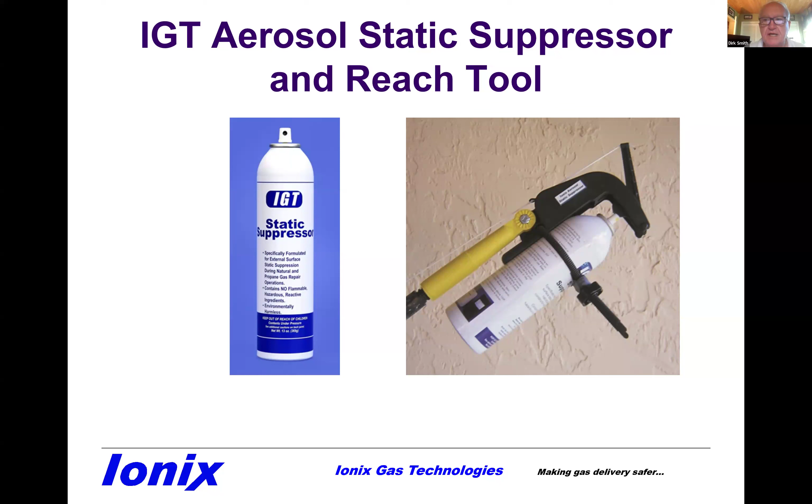This is excellent for any safety meetings. If you're already using the product, it will help you use it more effectively. If you're considering using this product, this will explain the benefits of using it, as well as an excellent educational opportunity for your field personnel to learn to deal with static ignitions.

So we're going to start with this video.

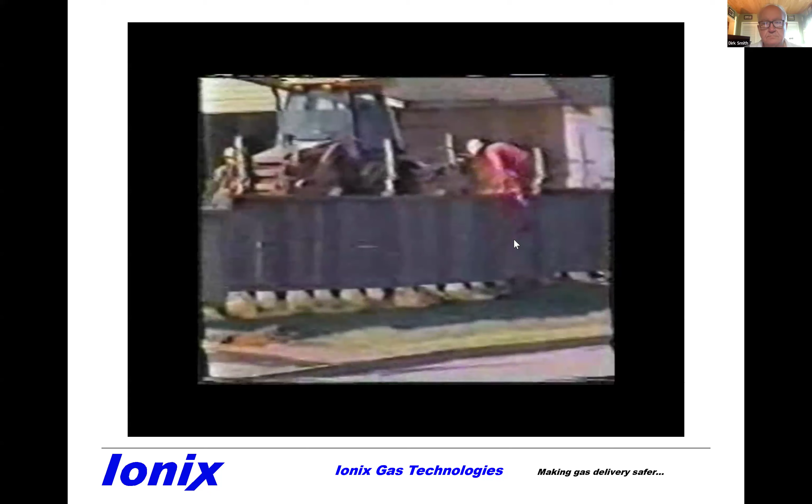A natural gas explosion rocked an Oklahoma City neighborhood just before noon today. Workers were trying to repair a ruptured line at Northwest 131st and MacArthur when the gas ignited. Newsline 9's Heidi Browning joins us live from that neighborhood. Heidi? Well, Kelly, there's a bit of a mess out here in the neighborhood. You can see behind me what's left of a fence, charred remnants of the posts, and quite a lot of digging that's been done to make repairs to those lines. But people coming home this evening will find a much calmer scene than what many people saw this morning. It started as a fairly routine repair job. ONG workers were trying to get the gas turned off after a 2-inch medium pressure line was accidentally cut. Suddenly, the gas exploded, sending huge flames into the air. 2 workers received minor burns. ONG officials say there's preliminary speculation that static electricity in the plastic pipe somehow caused the explosion. It took about 30 minutes to control the fire and get the gas turned off.

I apologize for the quality of that. That was done at a time prior to cable, and it was recorded off an over-the-air broadcast. But it's the only instance of an actual third-party damage igniting while workers are on site. And the purpose of this video is to prevent that from happening to your field personnel.

This chart was shared with me by Dave Zach at Aegis. He's a senior utility loss consultant for Aegis. Aegis insures virtually every gas utility in the United States. And the reason this is significant is everybody has their opinion of what causes losses or damages in the natural gas industry. This is what your insurance company actually pays out, and there's no better indication of the real problem than this.

If you look at this, over 80% of all the money paid out by your insurance company to local gas distributors is paid out as the result of an explosion or fire. That is more than all the other causes combined. This is telling you that your priority is to prevent an explosion or a fire. If you want to reduce your losses at your utility, this is how you're going to do it.

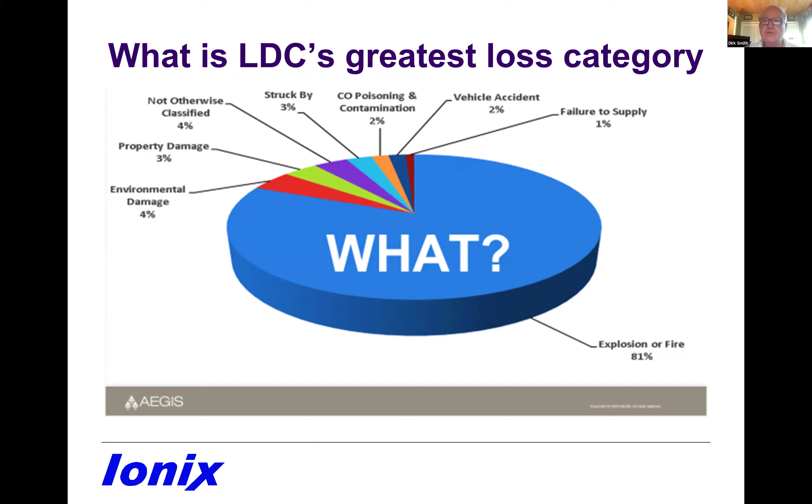And that's what we're going to be addressing today as we talk about static electricity and suppressing static electricity.

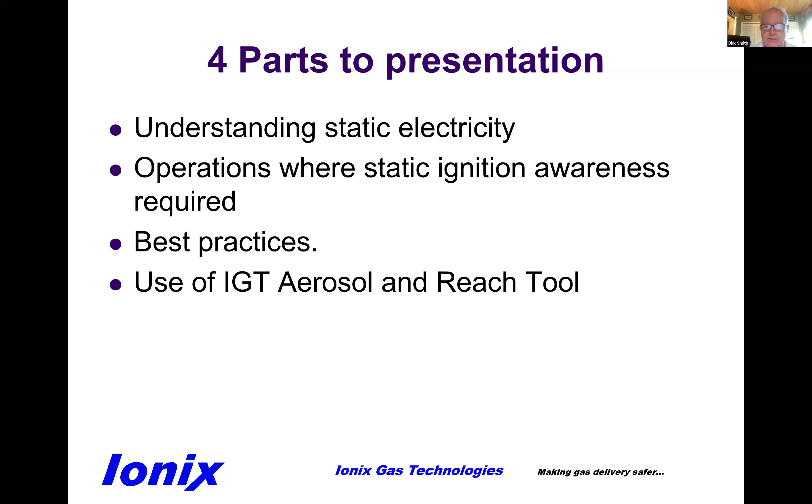Now, there are 4 parts to this presentation. I don't want to just give you a bunch of rules of what to do. I want you to have a little understanding of static electricity so you can recognize what it is. So we're going to talk about what static electricity is, the specific field operations where static ignition awareness is required, best practices, and then how our IGT Aerosol and Reach tool helps you achieve those best practices and reduce the possibility of a static ignition in your field operations.

So first things first, let's make sure we're all using the same terminology. When people say static electricity, for some reason they think it's some kind of inferior kind of electricity. I mean, there's real electricity that comes out of the outlet in your house that's powering my house, powering my PC and recording this video. But static electricity is kind of inferior, not as dangerous. Not so.

Electricity is electricity. The only reason it's called static electricity is because, unlike other forms of electricity, it's electricity that's sitting on a material that doesn't allow it to conduct. It's sitting on a material that's an electrical insulator, and therefore that electrical charge can't move. It's static.

For instance, I'm down in Boca Raton, Florida, and up in Juno Beach, Florida Power and Light has a generator. That electrical generator creates a whole pile of electrons, and it deposits those electrons on a piece of copper wire. Copper in and of itself inherently allows for the flow of electricity through it, and that's essentially how they pipe it, just like you pipe gas to a service. That's how they pipe electricity into our house - they put it on a copper wire and it flows along that wire into that outlet and powers this PC.

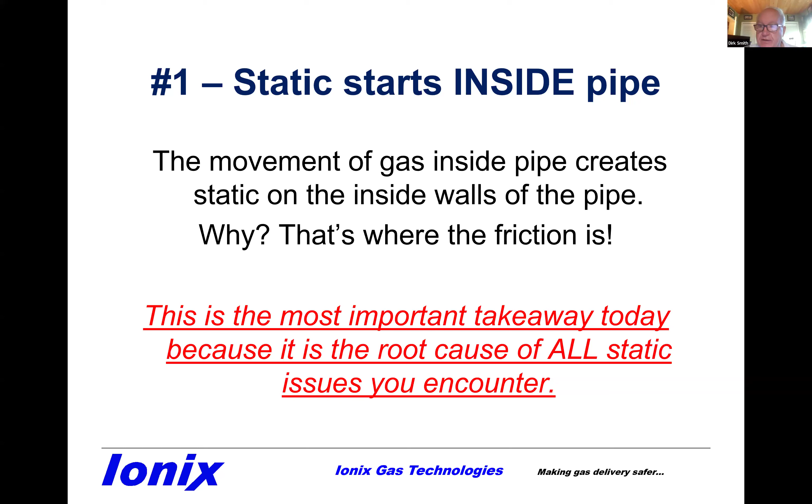Now, this is a little demonstration for our aerosol static suppressor that we recorded. The purpose of including it in this video is for this reason: static electricity, you cannot hear it, see it, smell it, taste it, or feel it. You do not have the sensory capacity to determine its presence.

This is an electrostatic voltmeter, mounted on a board. On the bottom of that meter, you can't see it, but there's a metal plate. What happens is this: when electrons start to accumulate, they start to throw off an electrostatic field. That field is detected by the metal plate, and the needle will deflect, indicating the presence of an electrostatic field.

So the purpose of this video is to show how easy it is to develop a static charge in a piece of poly pipe. This 60-second video will demonstrate the effectiveness of our aerosol static suppressor in eliminating static on the exterior of polyethylene pipe. We've mounted an electrostatic voltmeter above a section of pipe, and now as we reach over and rub the surface with some nylon cloth and move it, you'll notice the meter is indicating the presence of static.

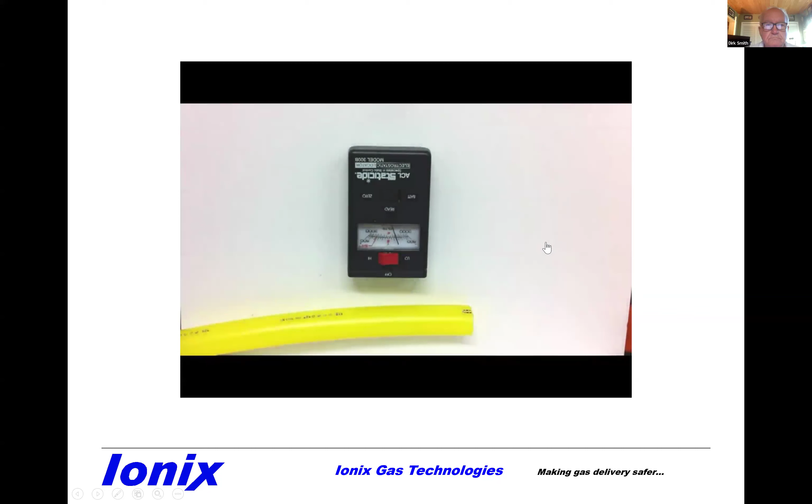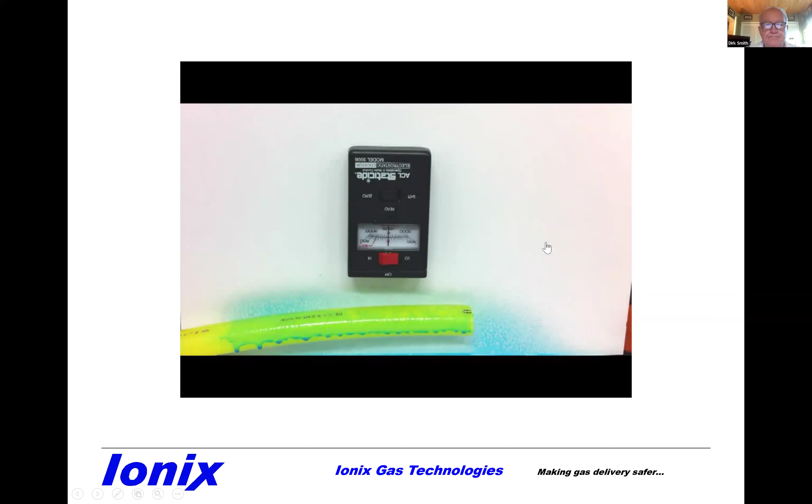We then take our aerosol, spray the surface, and you see that the surface static has been diminished immediately, indicating no static is present. If it's blue, there's no static. Now, the reason this is significant is because what we did on the outside of that pipe for 10 seconds is what's going on the inside of your pipe 24 hours a day.

Number two of the basics of static and poly pipe: once that charge is created and generated, it just won't go away. Remember, it's called static electricity because it's electricity that can't move. It's generated on a surface somewhere, and that charge just sits there. It can't conduct away. You can't ground the end of that poly pipe and expect that charge to conduct and move across the surface to that grounding strap because the material won't allow it to do that. That's why we call it static electricity.

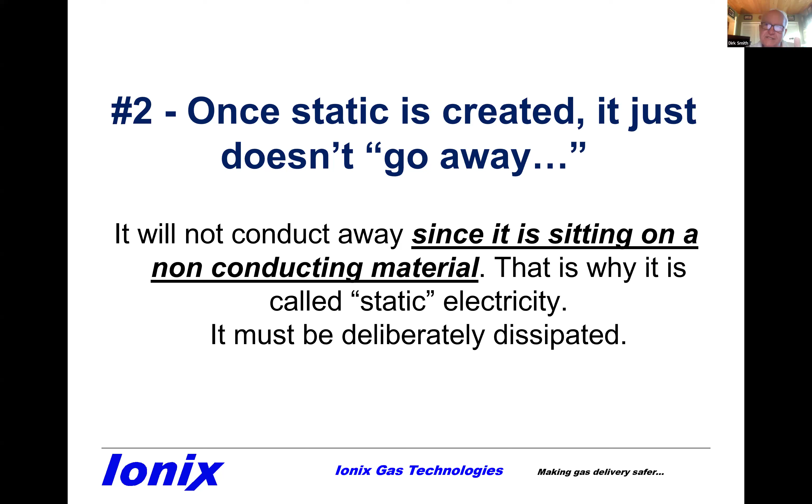So you have to deliberately go and dissipate the static where it is. The third thing, and this is not intuitively obvious, I could explain the physics to it.

The research has proved it to be true, but just take my word for it because it's too complicated and not necessary to understand the physics of it. When static charge is created on the inside of the pipe, it induces a charge on the outside of the pipe. So basically, when static is generated in a poly pipe, it's generated on two surfaces.

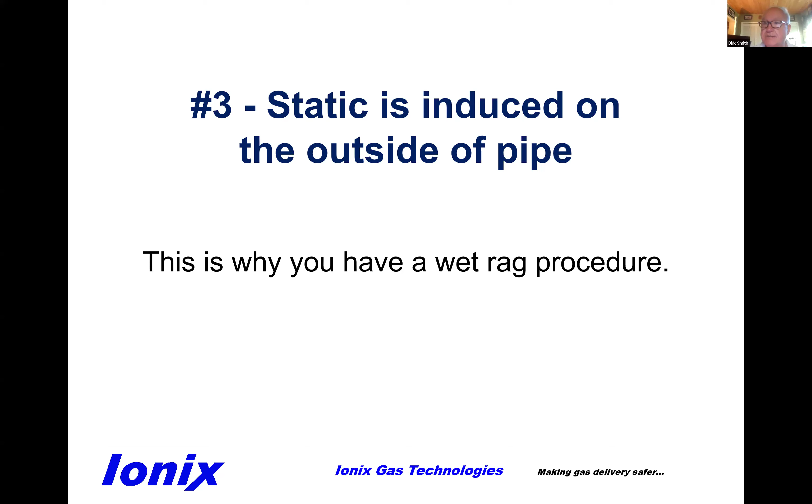It's generated initially in the interior, but it creates a charge on the outside surface of the pipe. That's the reason why in the past you've done static dissipation with wet rag procedures on the outside of the pipe. All static charges will arc - electrical static charges want to go to electrical neutrality. If you give them the opportunity, if you expose that charge in a gaseous mixture with exposure to ground, it's going to arc to neutralize itself. When that arc reaches 3,000 volts, it generates 1,100 degrees of heat, which ignites a gaseous mixture.

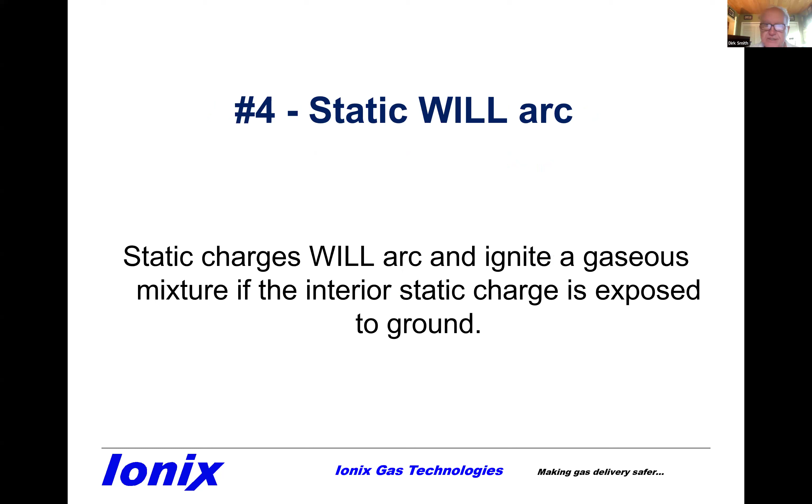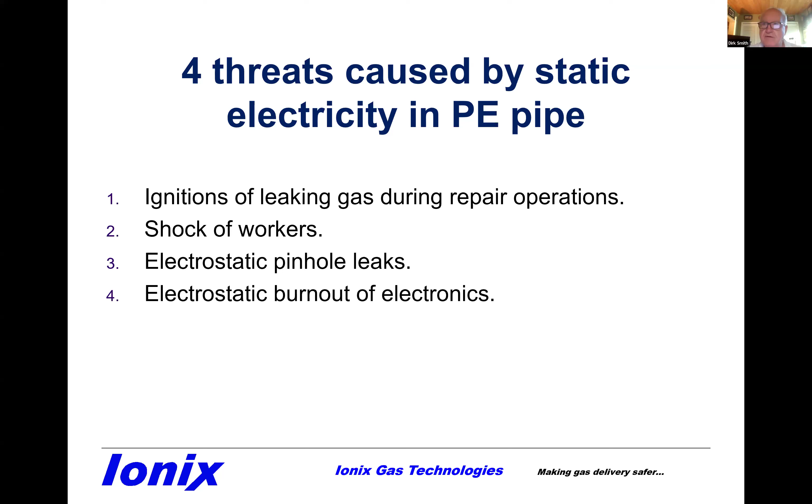So the static that's generated inside your pipe really creates four problems. We're basically only going to talk about the first one, very quickly about the second, and just gloss over electrostatic pinhole leaks and electrostatic burnout. But static in poly pipe causes these four things, and the root cause of all of them - electrostatic burnout, pinhole leaks, shock to workers, and ignition - goes back to that most important takeaway: all static is generated on the inside of the pipe by the passage of gas. That's the root cause of all four problems.

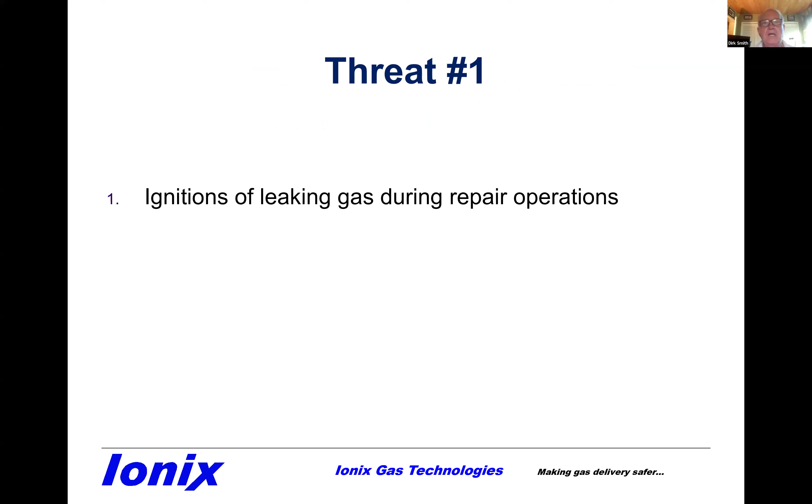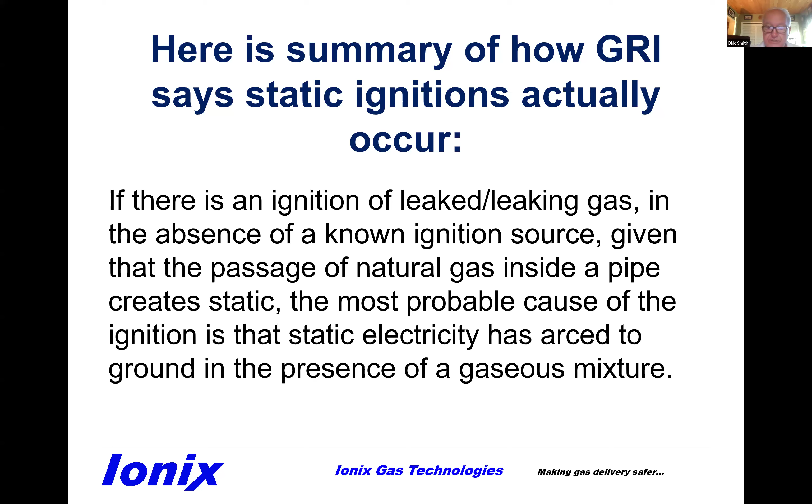So we'll talk primarily today about the problem of ignitions and leaking gas during repair operations. GRI says every ignition has to have an ignition source - every one, you can't have an ignition without one. Given what they determined about static electricity being generated by the passage of gas inside a pipe, if you've got an ignition of leaking gas with no obvious ignition source, by default the probable cause is static inside that pipe. So you have a very unique problem distributing gas in polyethylene pipe - in the delivery of your gas, you're creating its own ignition source inside that pipe.

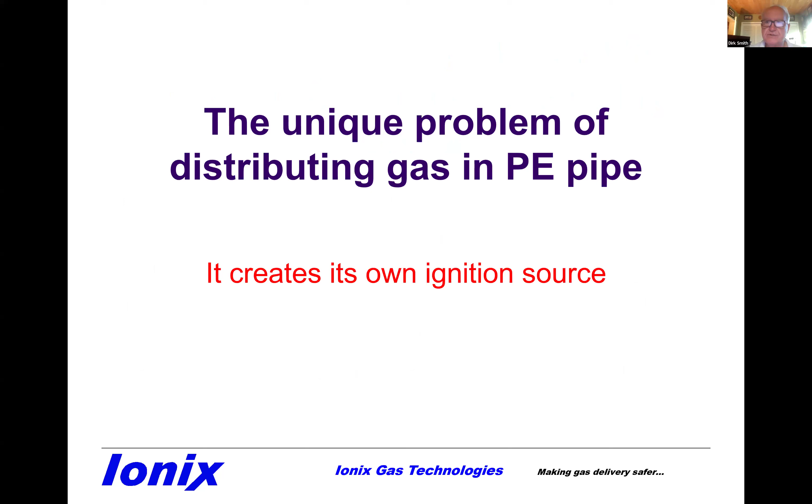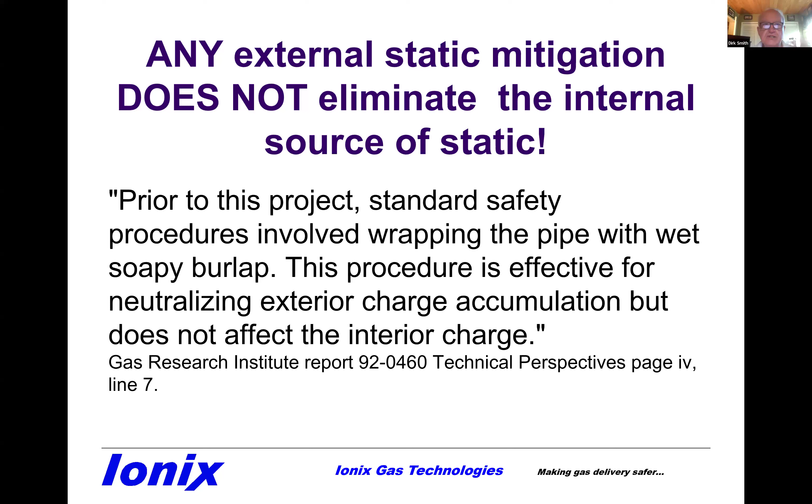That's what's happening. Now it's important to understand - remember, static electricity is generated on the inside of the pipe, and it creates a charge on the outside of the pipe. Whenever we talk about external static dissipation, GRI emphasizes this, and that's why I include it here: dissipating the charge on the outside of the pipe does nothing to get rid of the charge on the inside. So if you cut into the inside of that pipe and there's static there, you could still have an ignition, even though you've dissipated the static on the outside.

Now we're going to talk about the four most dangerous static ignition operations and how to use our aerosol to mitigate the risk of an ignition. These won't be any kind of deja vu experience for you - you'll be aware of all these. That's not the point. I want you to understand where the problem is in each of these operations so that if you're using our anti-stat, you're addressing where the static is in that operation to minimize the risk of an ignition and somebody getting hurt.

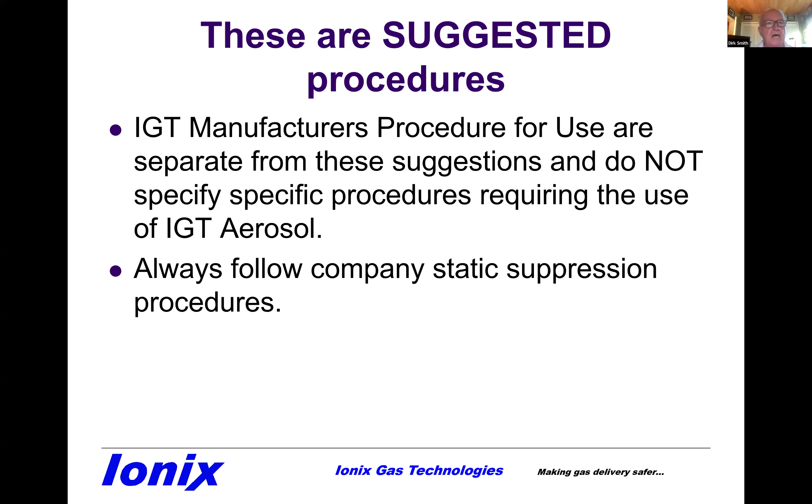I don't have time, but I can tell you horror stories about guys who didn't do that.

We're going to talk about the first thing. The most common and most major situation is when you have third-party damage repairs or O&M operations.

You have to understand that you need to get rid of the static on the outside, but you also want to be sure to get as much anti-stat as possible inside the cut or tear, the damage in the pipe, to reach those areas where static is being generated.

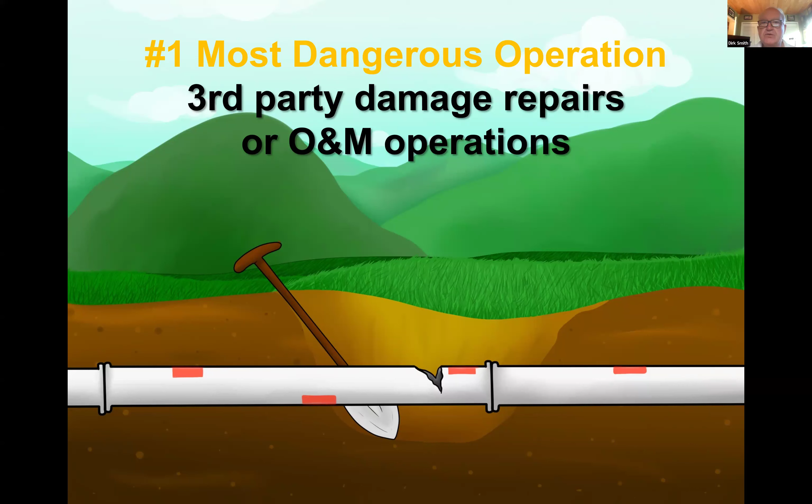So when you have a third-party damage pipe or an O&M like this, you want to spray the outside of the pipe from a safe distance of at least 6 inches.

We have a reach tool, and I'll show you what that's like. Essentially, it's like an extension pole that holds our aerosol and allows you to stand at a safe distance and spray. So when you have a damaged pipe like that, you want to stand outside, spray it from a safe distance, and make sure everything's blue.

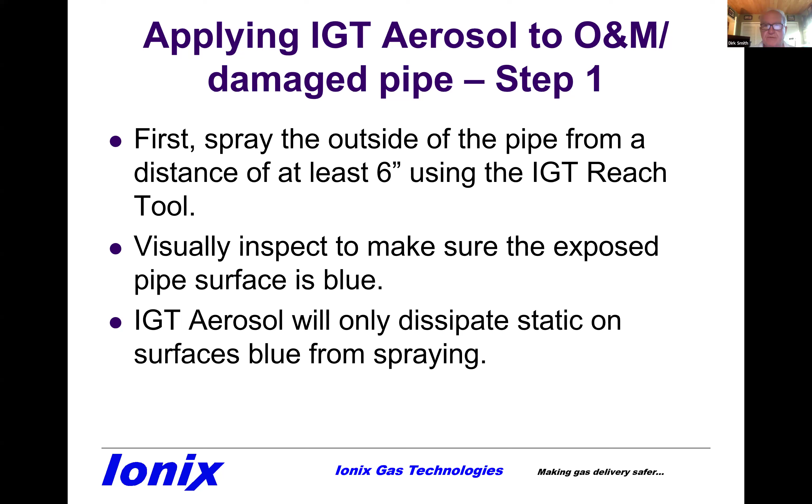Remember, our aerosol will only dissipate the static charges when the surface is blue, meaning it's wet from our spray. If it doesn't get sprayed, there's still a static charge present.

Once you've stopped the flow, you can carefully spray into the cut or the damaged area to try to get the aerosol to touch any static that's inside the pipe. If the pipe is blowing, you obviously won't be able to get the spray into where it's blowing, so get it as close as you can.

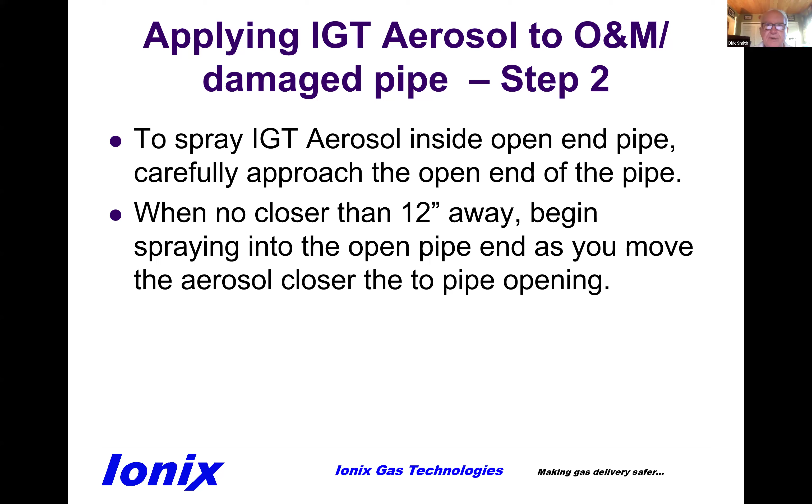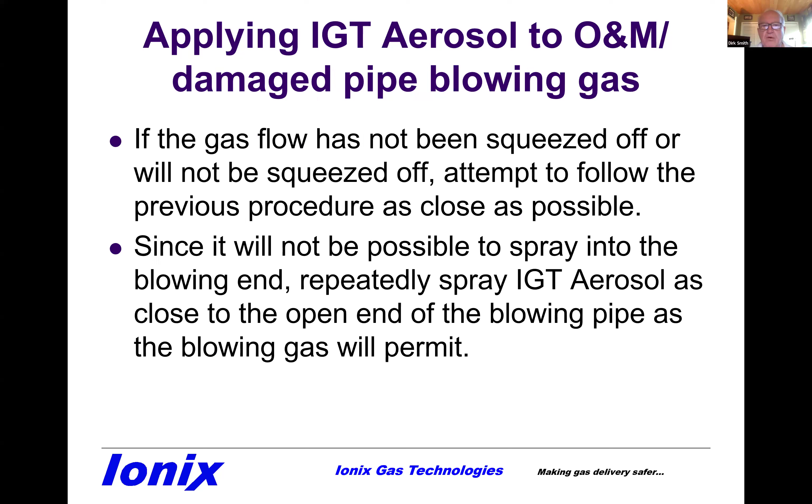As soon as the flow is stopped, spray on that spot. If you've squeezed off the pipe and you're going to cut into it, spray the tool and spray on that area so our aerosol is carried in with the tool and can dissipate any static inside the pipe. If the pipe hasn't been squeezed off, spray as close as you can to the blowing hole to get as much anti-stat near that surface as possible.

Now, the second dangerous operation is purging gas. This is kind of like third-party damage, except it's controlled by you.

What happens in metal pipe is if there's dirt, grease, corrosion, or coatings, all of them act as electrical insulators, and static charges can accumulate on those surfaces. So always presume static is present, even though you've grounded it.

Just like that damaged pipe with third-party damage, where gas is escaping and static buildup is in the turbulence of the cut, it's the same way at the edges of the opening of that purge pipe. Static is going to build up on those inside edges.

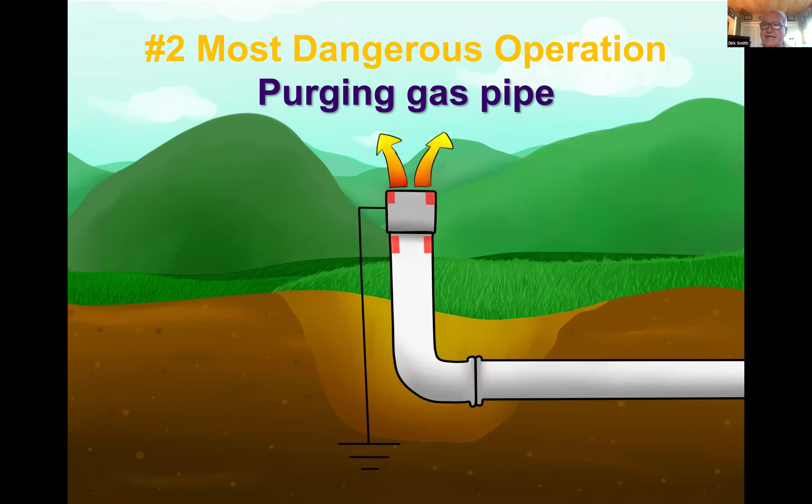And if you've got a joint with a coupling connecting metal pipe with plastic pipe, because the joint won't be perfectly smooth, you'll have turbulence between the metal pipe and the plastic pipe joint, and static can build up there. So be aware there's going to be static inside that connection, inside that pipe.

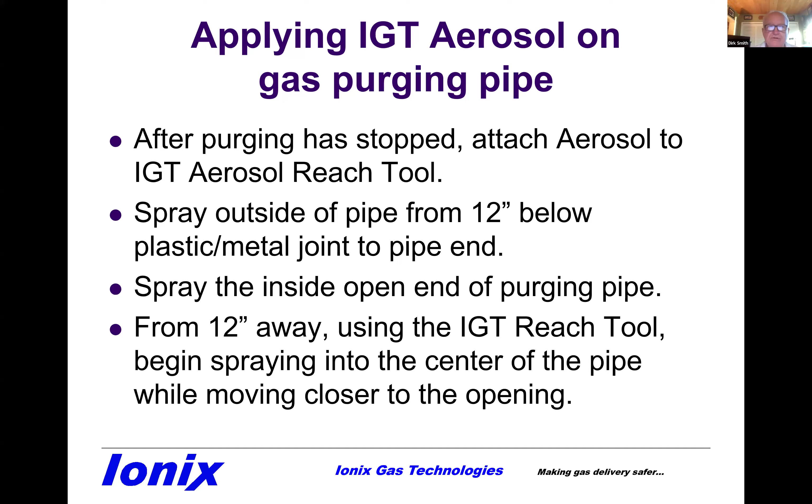So after your purging is done, use our reach tool and spray outside the pipe from about 12 inches below where the metal pipe and joint is. Spray the inside edge of it, and begin spraying as you get closer to it. Then also, when you take it off, spray inside it too.

Now the third major operation is when you're doing repair operations downstream of a squeeze off.

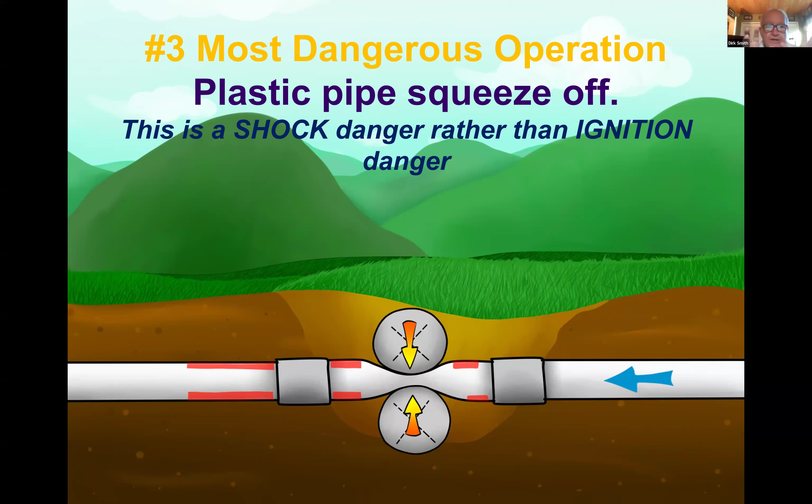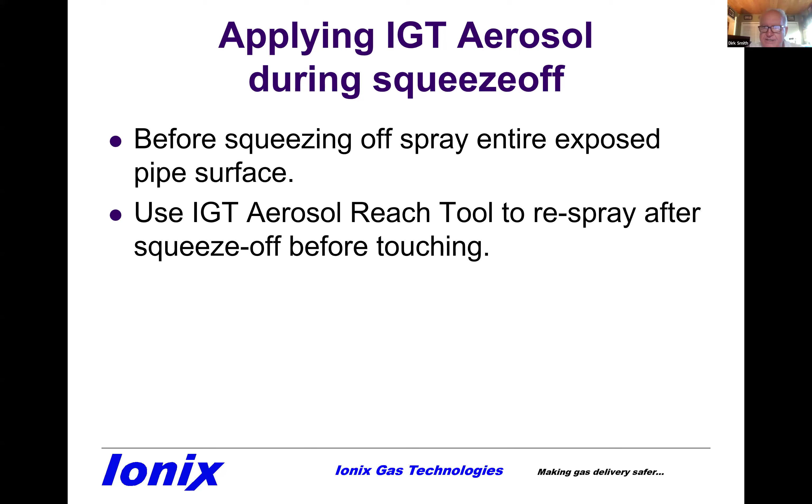It will also develop upstream, not as far, but it will develop upstream from your squeeze-off. So when you're getting ready to cut into that pipe, spray the outside of the pipe before squeezing it off, then respray it after your squeeze off before touching it, because it has such a high voltage being generated. When you're cutting into that downstream section, spray onto the tool and spray into the cut to carry our anti-stat inside where that static is going to be generated.

And if it comes in contact with any static, it'll dissipate the charge. Don't worry about the IGT aerosol getting in the gas stream. It won't bother it, and you won't get enough in there to make any difference. Just be sure to wipe the tool off of the IGT aerosol when you're done.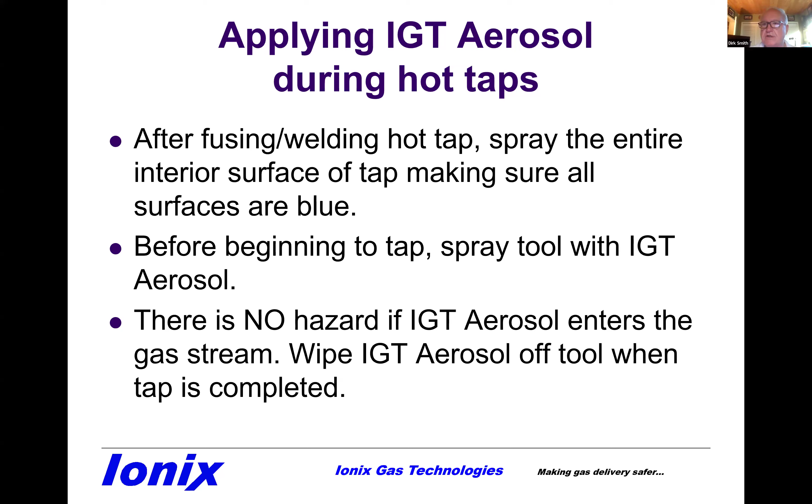Finally, when you're cutting into a piece of pipe that's previously been under pressure, removed from service, or cut into or reached into, always spray the outside of the pipe and the tool with aerosol. I had an instance where a couple of guys out in the western United States had a stubbed line, about a 6-inch stub line. What had happened is they were going to extend the service on the stub line.

So they shut the line down, took it off pressure, and these guys went with a tool to cut through the pipe. As soon as it broke through on the inside of the pipe, there was a boom, and the two guys went to the emergency room. No fire, electrical shock. The gas utility was embarrassed because they hadn't called for a locate. They called the local electric company and said, hey, sorry, we cut into some of your electric lines out here. The electric company said, we don't have any lines out there. It was static electricity in that stubbed line.

I also had an instance where a polypipe was cut and removed from service for some reason. A guy reached inside it. There was still enough residual static and methane in there, and it flashed and burned hairs on his arm.

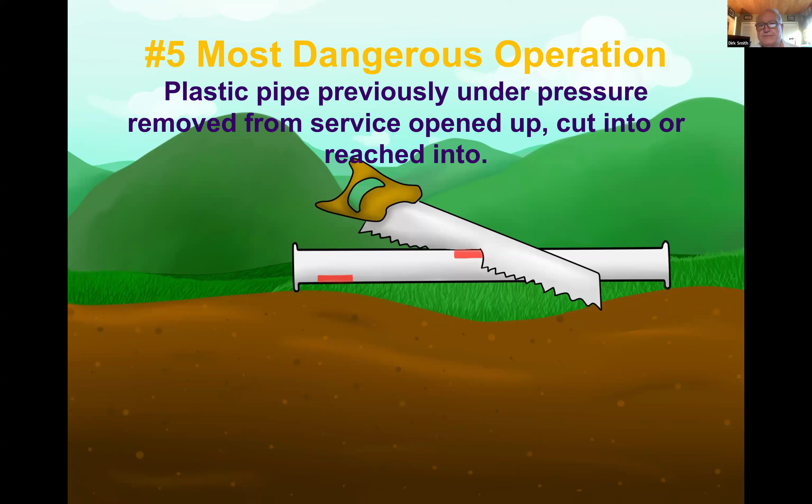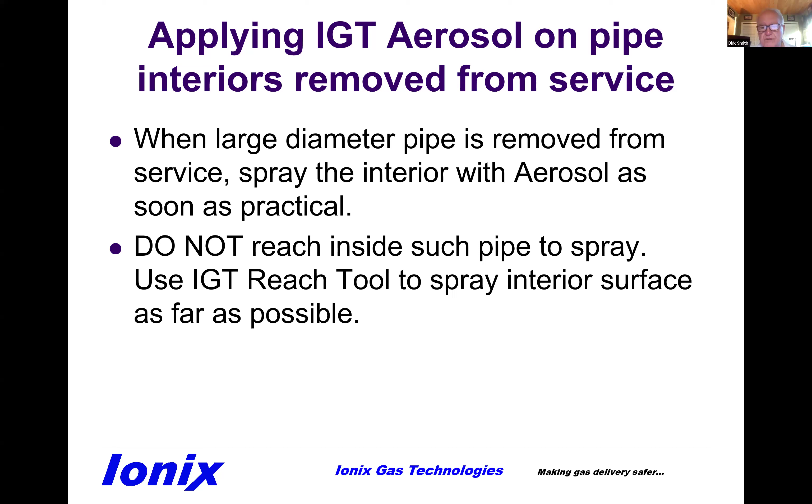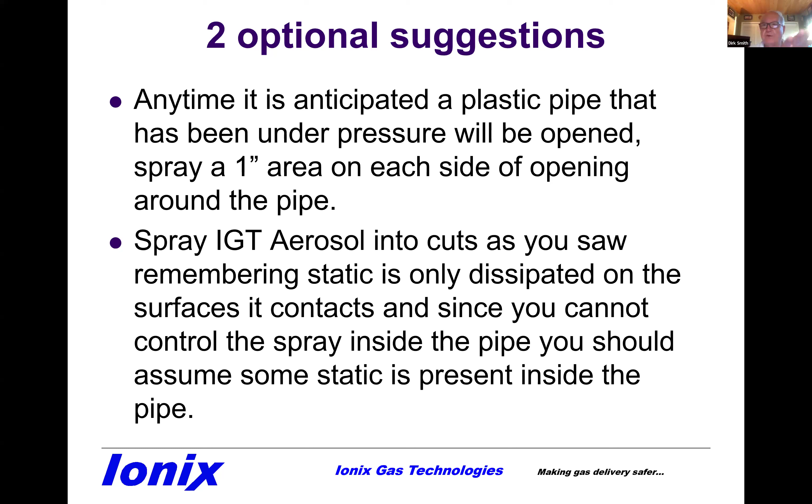So always spray the surface you're cutting into. Never reach into a piece of polypipe without spraying and dissipating the static charge in there. If you have to reach inside it, use a tool or a reach tool to get inside there to spray inside that pipe. If the pipe has been under pressure and you're going to open it up, spray a 1-inch band around it before cutting into it. And always, whenever you're cutting a piece of pipe, spray into the cuts as you're doing it, so our aerosol is carried into the cut when you're sawing it. That'll help dissipate any charges it encounters.

Now I want to talk about shock to workers. We're going to go back to squeeze off because this is the primary area where this is the case. Again, the static charge in there is so high. I had a report that there have been burn fatalities in the gas industry and O&M operations. That's no surprise. I hadn't heard of a serious shock incident until about 5 years ago when I was teaching the static class at the Northeast Gas Association Gas Operations School.

I was told of an incident that occurred up there where some guy was working and the static electricity from the pipe arced through him and went through him and out his big toe. It's all the static being generated inside that pipe. It could be during normal operations, but especially at squeeze off, you have to be extremely careful.

It was so bad it stopped his heart. So they had to give him the heart paddles and then defibrillators. And then he had his big toe amputated because it burned his big toe where the charge went out.

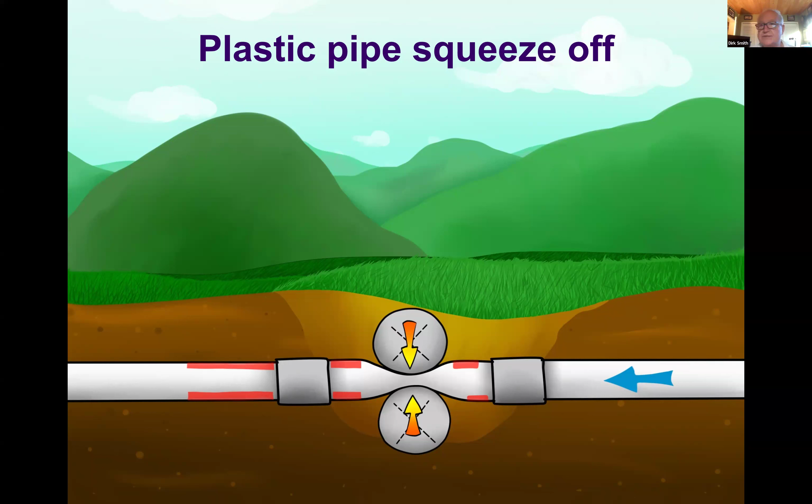So it's absolutely imperative that you always ground your tools. The grounding of tools is not a static suppression procedure, it is a worker protection procedure. If you encounter a charge, the charge goes through the tool, through the grounding strap, and into the ground. If you disable your grounding straps or do not use them, that static charge will come through the tool to you and out the bottom of your feet or out your arm, and you do not want that.

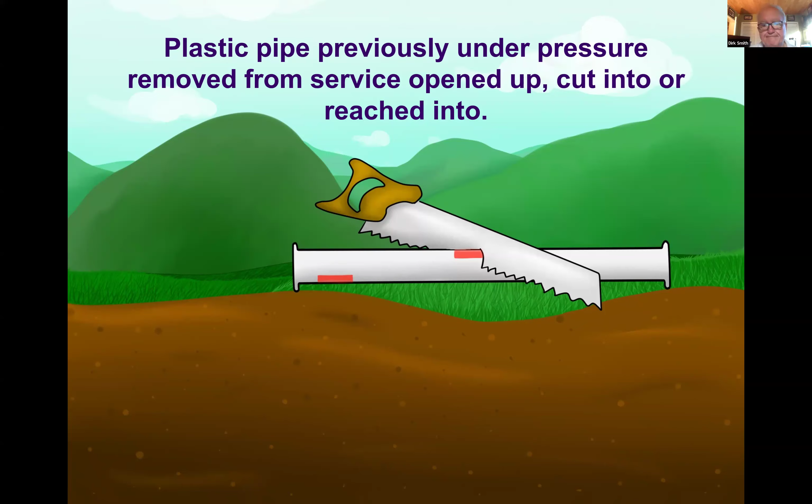Now I want to talk to you about the two last threats, which are electrostatic pinhole leaks and electrostatic burnout of electronics. Static electricity causes pinhole leaks in polypipe. In some systems, when we got rid of these pinhole leaks, there was an 80% reduction in leaks. There is probably a lot of leaks in your system which you just think are leaks, when in reality they're being created by static electricity.

That's not my point in talking to you about that. The reason you need to be aware of that is this: it is very common when you squeeze off pipe, the static charges are so high downstream that they put pinhole leaks in the pipe. So therefore, when you squeeze off, you should always soap leak test the pipe, all the exposed area, before you bury it again to make sure you don't have any electrostatic leaks.

If you find pinhole leaks in your system, it is not bad pipe. Every time pipe manufacturers have been accused of having defective pipe, forensic lab analysis 100% of the time has said it is static electricity. It is not defective pipe. If you have that problem, call us.

And finally, the other thing you're going to start to see more and more is electrostatic burnout of electronics. If you have solid state electronics, which is extremely sensitive to static electricity, and you have static in your system, that static can arc through a barrier, arc to the electronics and burn it out. I've had instances of locator transmitters being burned out when the static charge inside the pipe arced to the tracer wire and back to the transmitter and burned it up.

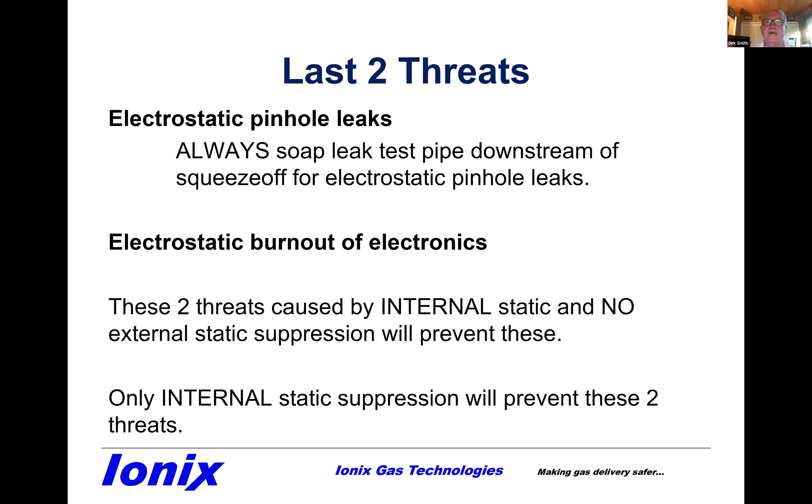So remember what I said before. There are 4 threats from static electricity: ignitions, shocks, pinhole leaks, and electrostatic burnout. And the root cause is cause number 1 from the slide I told you, don't forget: all static is generated by the passage of gas inside the pipe. It starts internally, that's the root cause. It manifests itself in ignitions, in shocking workers, in creating pinhole leaks, and in burning out solid state electronics.

Now we can talk about our static suppressor. Our static suppressor is a state-of-the-art static suppressor. Back in the 80s, when polypipe started being used in the United States, this problem of static electricity became evident. The problem was there was no other solution.

AGA recommended wet rags. Essentially it is a grounding mechanism. You take those wet soapy rags, wrap it around completely on the surface, trail it to ground. You assume there's a connection, you don't know. You assume there's an electrical circuit, that the water and the soapy water has completely covered the pipe, and any static charge is transmitted by the water, conducts through the water down to the ground. It is very clumsy, it's very awkward, it's dirty, it's slow, it's labor intensive, but that's all you had.

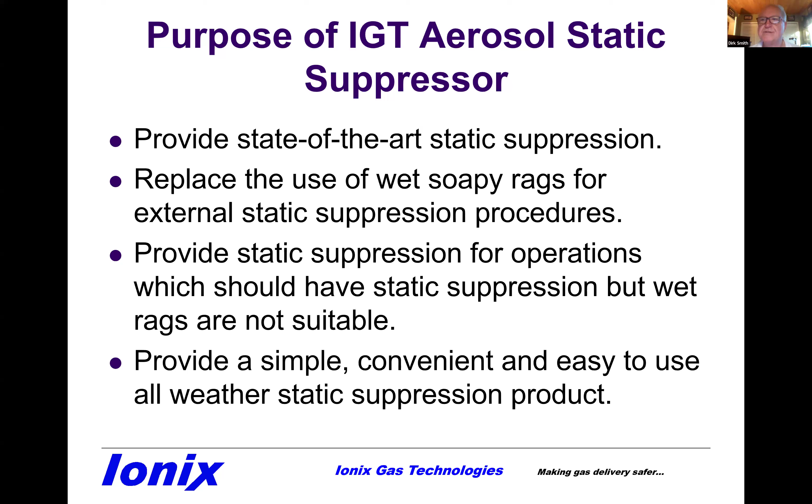Our aerosol static suppressor is designed to replace that. It's an all-weather static suppression product, very versatile. You can use it in a lot more operations than you could use wet rags. To make sure our product would not affect PE, would not affect your fusing operations, that it was not flammable, and that it was as effective as wet burlap in eliminating static, we went to the Gas Technology Institute's testing labs, and they evaluated our product and confirmed it doesn't affect the PE, doesn't affect fusing, it's non-flammable, and it's every bit as effective as wet burlap in eliminating static.

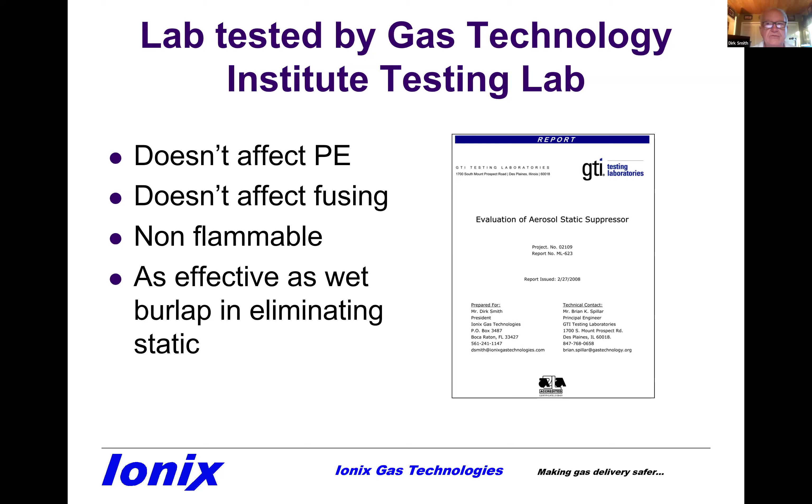And if you'd like the report, we can email it to you. Now, the nice thing about our aerosol is when you have soapy burlap, you have to keep that burlap wet, the pipe wet and everything. You don't have to do that with ours. When you spray the surface, that's it, you're done. And you don't have to ground it, you don't have to keep it wet.

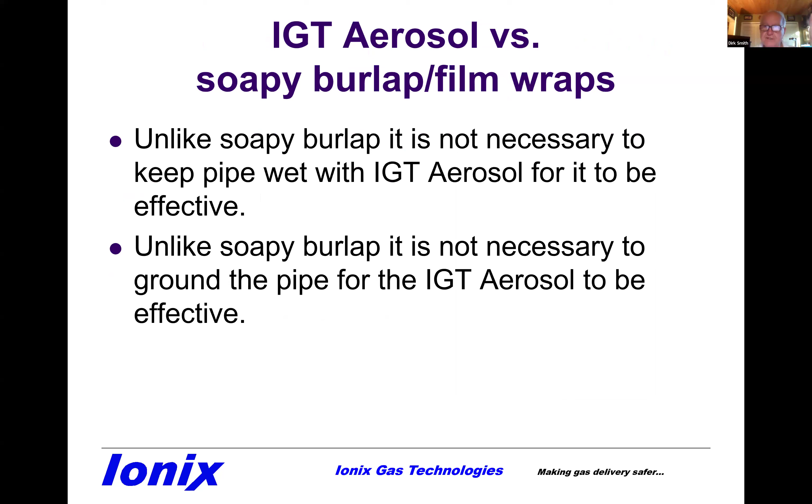When you spray a surface with our aerosol, it'll eventually dry down. It is still dissipating static even after it dries.

Our aerosol comes in two formulations. We have customers that are in very cold climates, so we have a regular formulation that sprays to freezing, maybe a little bit below freezing. And then we also have a formulation if you have to do repair work under 32 degrees, a low temperature formulation that sprays to -20. Both products work identically, except one has a lower freeze point.

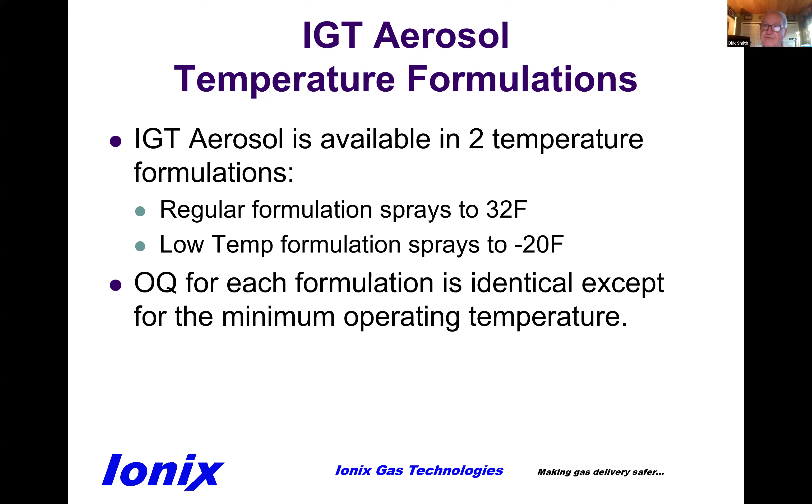If our aerosol happens to freeze on you, don't worry about it. Thaw it, shake it up, it's fine.

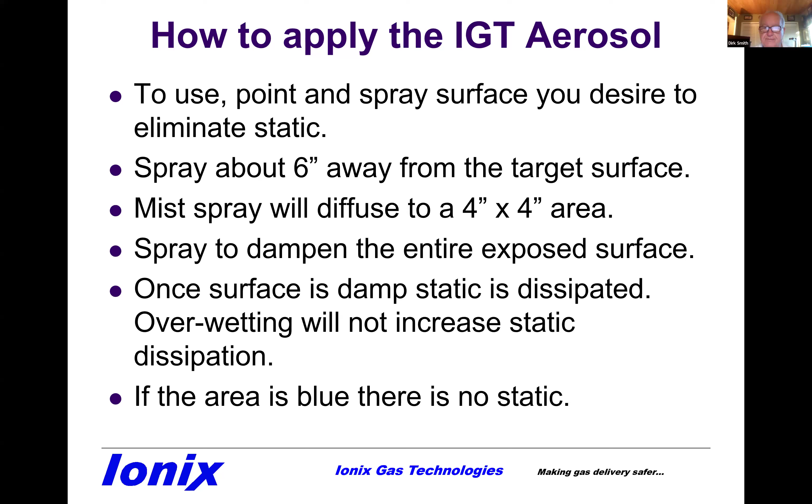It's very simple to use. You just point and spray, get about 6 inches away from your target surface. It's going to mist a 4x4 area and just dampen it. You don't have to get it wringing wet. Once it's damp, the static is dissipated, and overwetting will not increase any static dissipation. If the area is blue, you can see it's blue, there's no static.

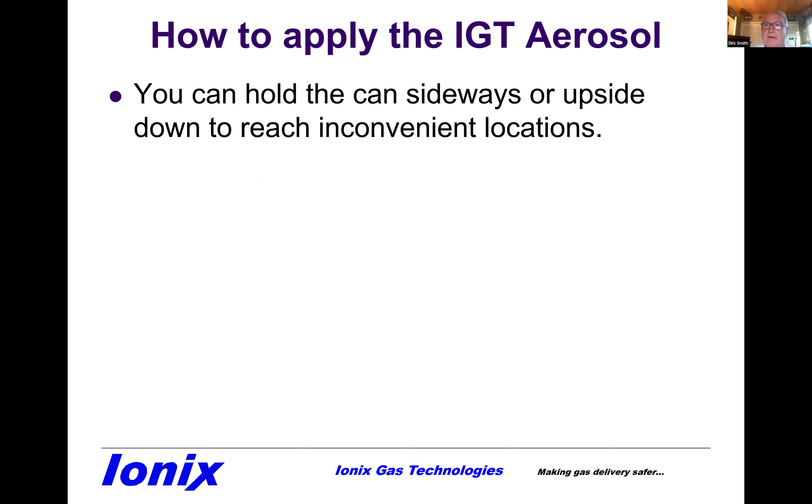Our can will spray upside down, right side up, or sideways. That's important when you have our reach tool. Let's say you've done a squeeze off on an excavation, and now you want to dissipate the static. On the reach tool holder, you can tilt the end and spray upside down if you need to. This is just a little demonstration of how to spray it. Whoa, that didn't work well. Here we go, let's try this again.

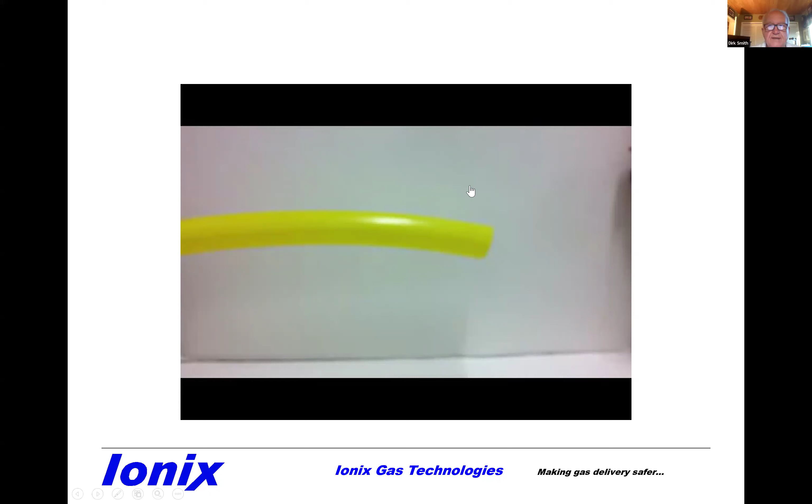Just a simple spray, doesn't have to get super wet. That's all you need to do.

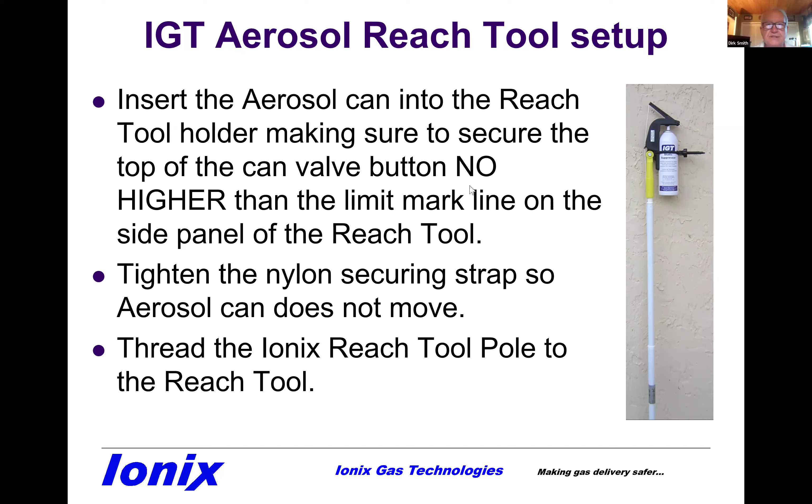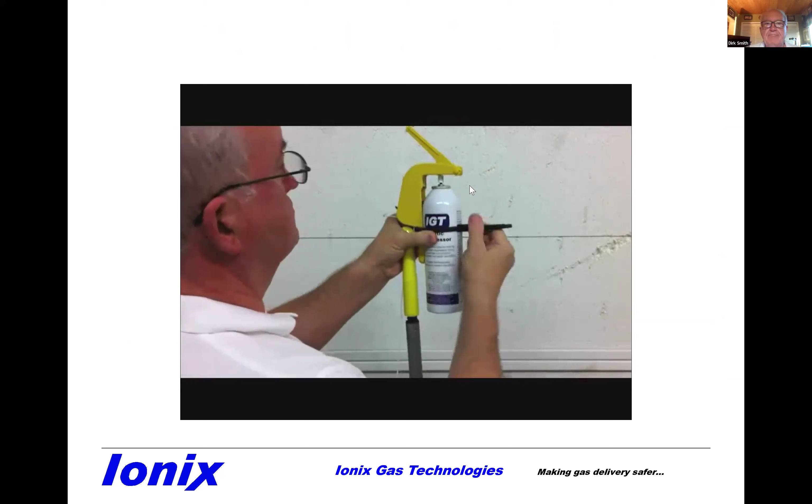All you do is insert our aerosol can in the holder and tighten it up. There's a limit marker there. You just tighten it up and then you're ready to go. It will sit there. This is just a little quick demo to show you how you put it in the can, tighten it up, and then it allows you to spray any kind of surface from a safe distance.

Again, if our aerosol freezes in the can, don't worry about it. Just thaw it out, it'll be fine. Shake it up. When you spray it on a surface and it freezes, don't worry. The liquid has water and a few other chemicals in there, but the anti-stat, when it's on the surface, even though it would freeze, it's still effective in dissipating the static. Reapplication is not necessary.

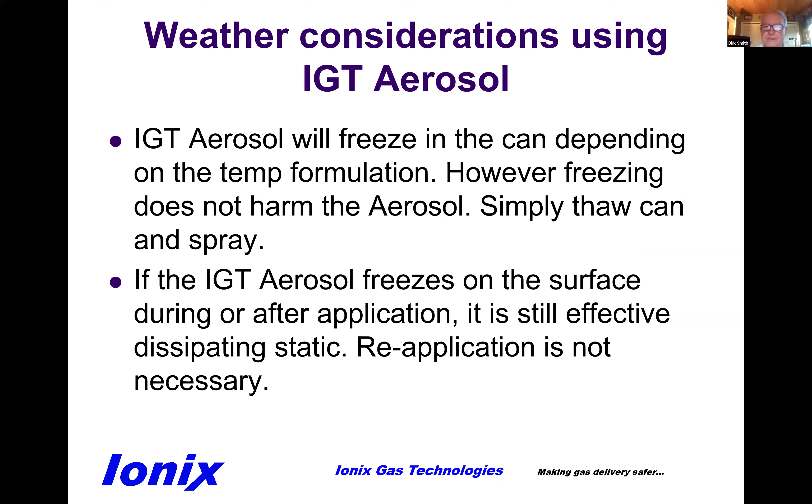While we have two different lower limits on the aerosol, there's no practical maximum temperature, because if it got high enough to make our unit ineffective, you're not working in that anyway. So you don't have to worry about that.

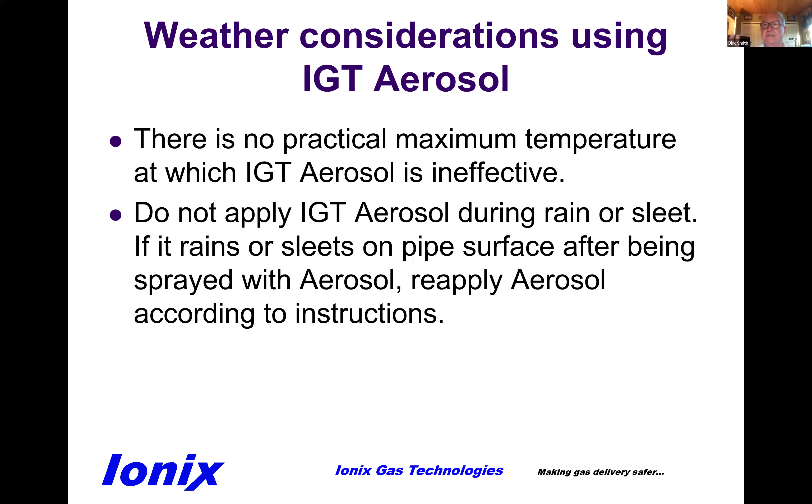Don't apply our IGT aerosol when it's raining or sleeting, because it's just going to get washed off. So wait till the rain or sleet stops, and then spray it on the surface.

Make sure you visually inspect it, make sure all the surfaces are blue from the static spray. Only surfaces that have been sprayed with our aerosol are going to have static dissipated, okay?

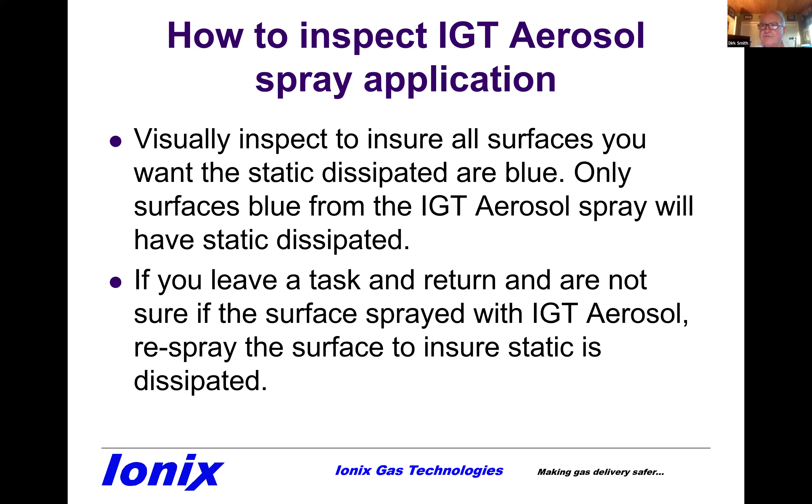Now let's say you spray a piece of pipe and for some reason you have to leave. You don't necessarily have to respray it when you get back to ensure the static is dissipated. If you're gone for a couple of weeks or it gets rained on, yes, you've got to respray it. But generally, if you leave it for a day or two, you shouldn't have any problem.

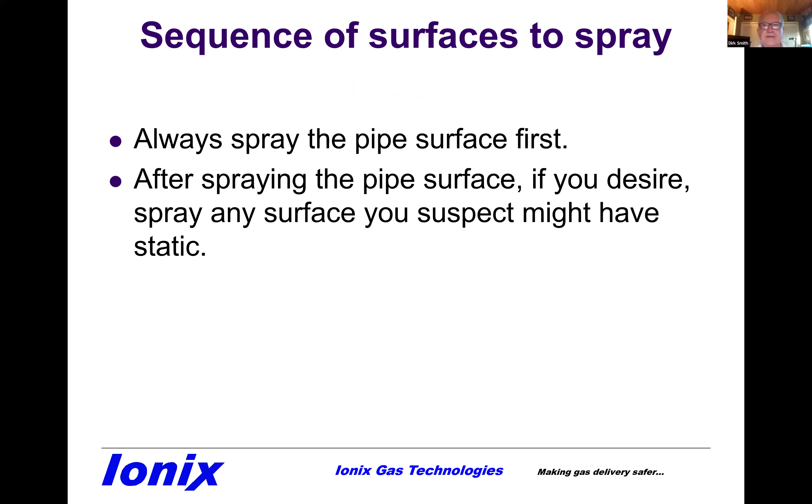Always spray the pipe surface first. Why? That's where the static originates, that's the root cause. After you do that, if you want to spray another surface, a tool, anything like that, go ahead, but always spray the pipe surface first.

Our aerosol will dissipate static immediately on contact when it dampens a surface, and that surface could be anything—plastic, metal pipe, a tool, clothing. We don't recommend it on clothing, but people think static electricity cannot build up on pipe. That is not true. Any kind of pipe that has a coating on it, or oil, grease, or dirt, those areas act as electrical insulators, and static charges can accumulate on those areas. So you can use our aerosol on those surfaces.

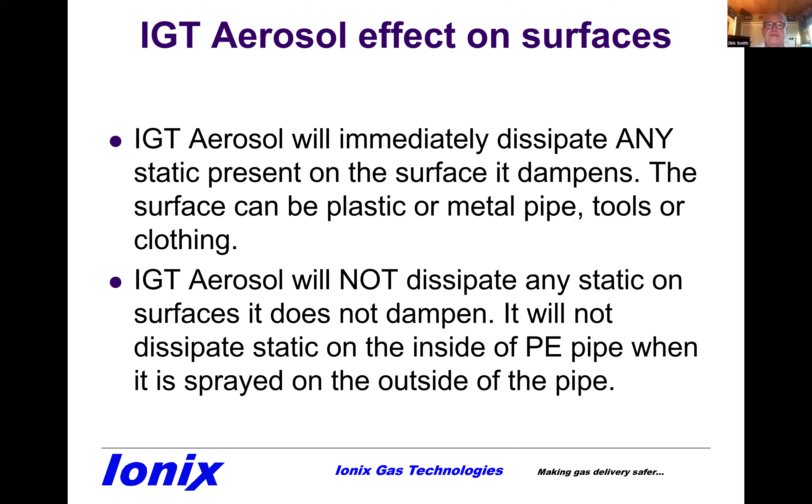Remember, our aerosol will not get rid of any static on surfaces it doesn't dampen, and static inside the pipe is not dissipated when you spray our aerosol on the outside of the pipe.

You can spray IGT on any tool to eliminate any static present, and it does not affect your grounding. It will not affect the grounding of tools if your company procedure is to ground tools.

I had a call recently from a guy whose company is writing our anti-stat into their procedures. He said you could set the tool on top of the pipe when they sprayed it, and he thought our aerosol would act like a barrier from the pipe to the grounding tool. It will not. Actually, it'll be an electrical conductor. It will make your grounding tool work better.

So you don't have to worry about having sprayed a pipe and putting the grounding tool on it, with our aerosol static suppressor on the surface of the pipe when you ground it. Do not change your company procedures concerning grounding tools when you use IGT aerosol.

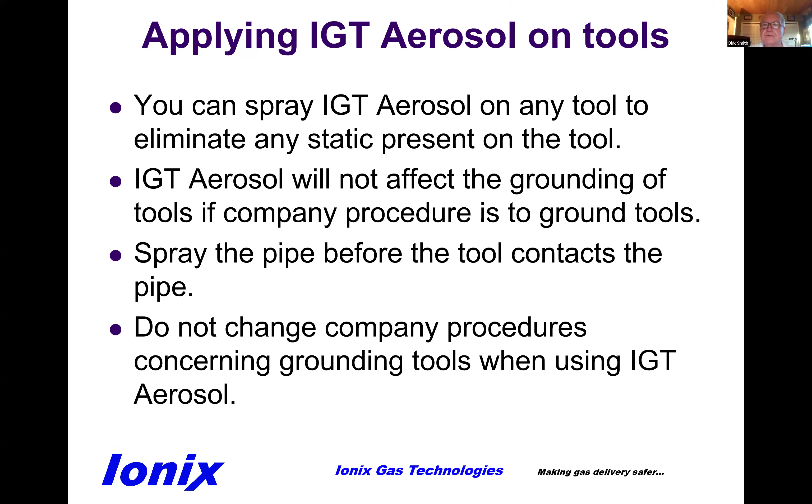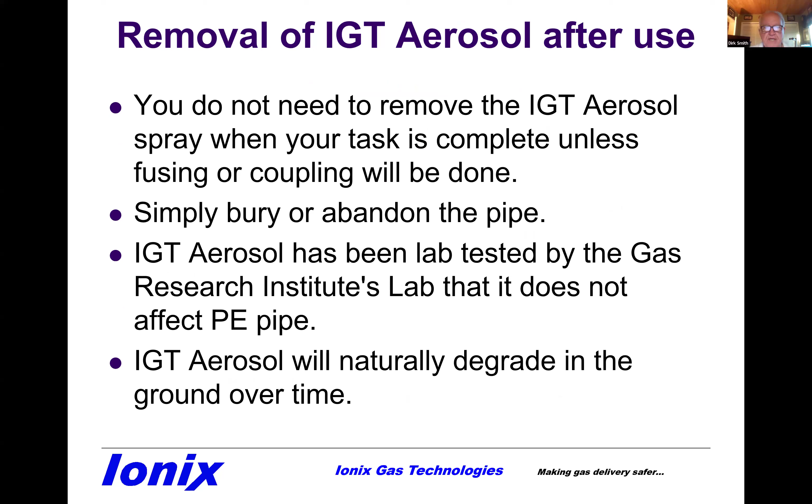You don't have to remove our aerosol from the pipe when you're done. It will biodegrade. You can simply bury it and abandon it, and it doesn't affect the pipe. It just naturally degrades over time when it's buried.

If you're fusing, you're going to prep the surface according to the fusing company procedures. That will remove any residual IGT aerosol spray. This will either be wiping it off with a clean rag, washing with soapy water, scraping, or wiping with an ISO rag. So if you're fusing, just be sure you prep the pipe according to the fusing fixture manufacturer's instructions.

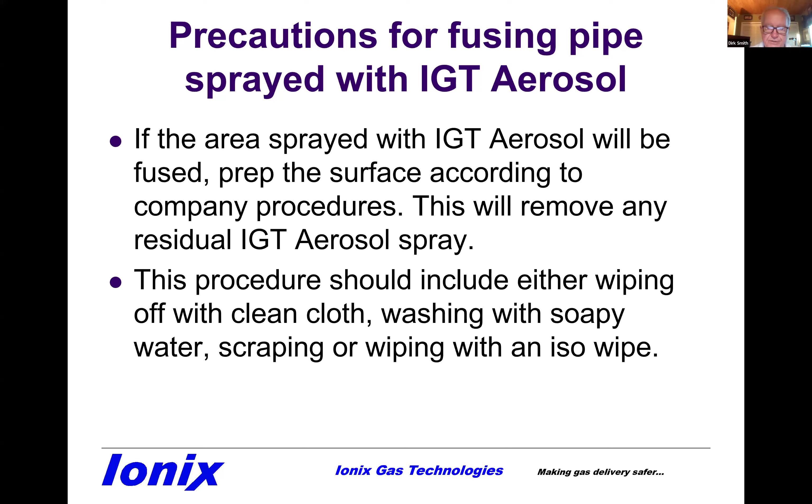If you're using mechanical couplings, just clean the pipe ends and remove any residual IGT, just like you were doing for fusing operations, and it will be just fine.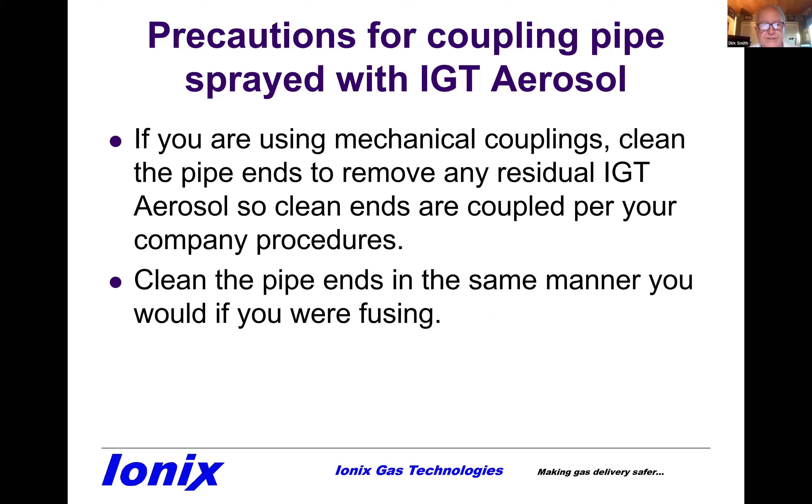People have asked us, what is the expiration date of our aerosol? Well, really, if it sprays, it works. But some companies said, hey, in our procedures, we have to have a drop dead date. So we recommend use within 2 years of the manufacturing date.

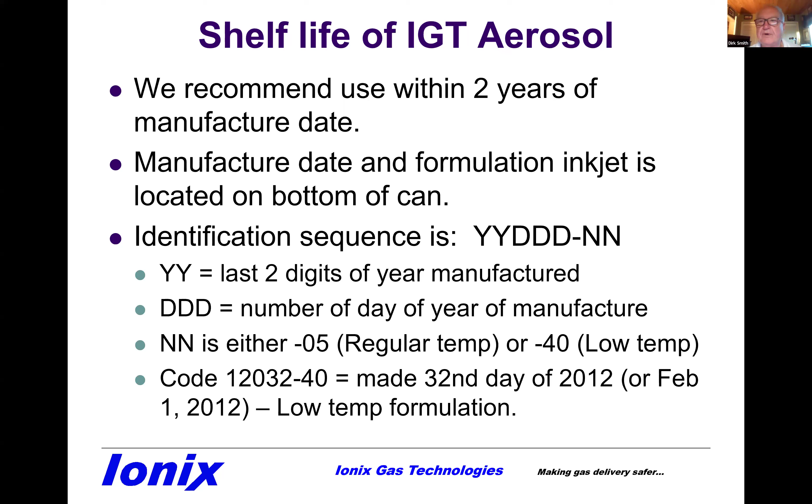We recommend 2 years. Again, use it within 2 years. Your job is not to inventory it. That's our job, and other people like MRC and people like that. So you shouldn't have to have a lot of inventory that would wind up being expired inventory.

Disposal of the aerosol cans: you can dispose of them according to local ordinances and your company aerosol can procedures. Now, most aerosols in the United States use propane as the gas to push out product. When you have paint like Rust-Oleum, remember when you were in college, you'd get the aerosol can of deodorant, put a match to it, and it'd burn.

Well, that's because they use propane in there to push out the product. We do not use propane in a hazardous environment. Our aerosol actually contains nitrogen as the propellant, and in doing so it's really almost like a fire extinguisher. It'll push out any oxygen and, in a sense, suffocate a flame. Our aerosol doesn't contain any hazardous materials or gases. It's aluminum, so you can recycle them with aluminum cans.

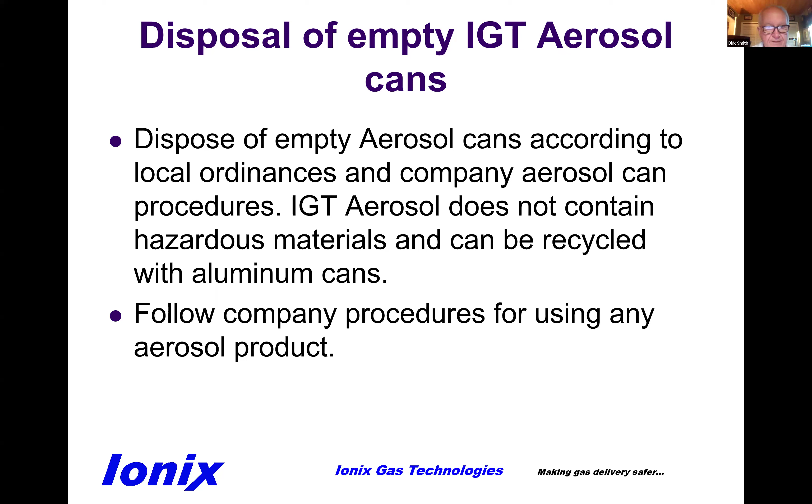Follow your company's procedures for using an aerosol product and disposing of it. Again, personal use considerations: it contains no hazardous materials. Like with any aerosol, avoid inhaling the spray and contact with the eyes. Our SDS is generally kept by your company, and there are also independent SDS purveyors that have it and hold our aerosol.

So basically, if you get it on your hands, just wash it off. Or if you get it in your eyes or something like that, just rinse it off with water and wash your hands with soap and water. Repeated contact, you may get a little itch, what they call contact dermatitis, but that's all it is. If you wash it well on your hands, it'll go away.